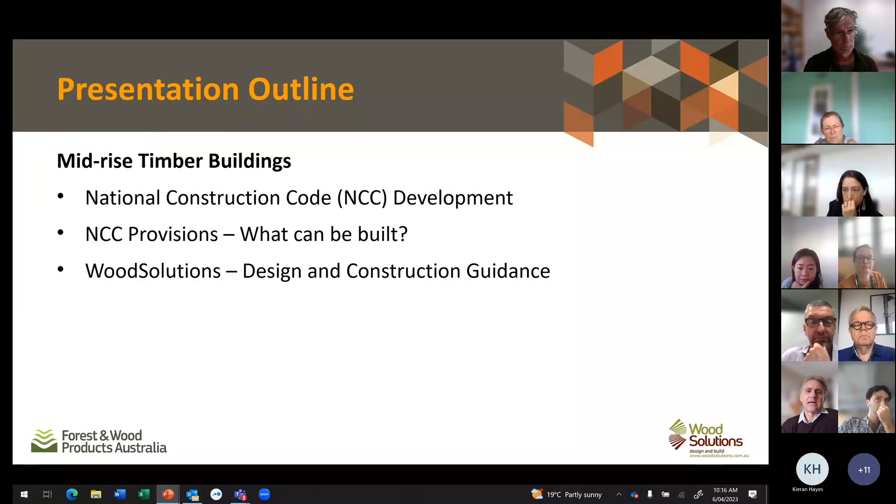Talk about the Wood Solutions program and the design and technical guidance that's provided. That's a program that Eileen Newbury manages. I'll run through just some case studies of some performance solutions that are out there, and talk about the challenges that are faced, particularly when we start to have these larger exposed timber buildings, sort of the issues that come up. I'll just call them challenges because they're not insurmountable, but they're just things that we need to do. And then look at what the next steps are from an industry perspective as to where we'd like to move going forward.

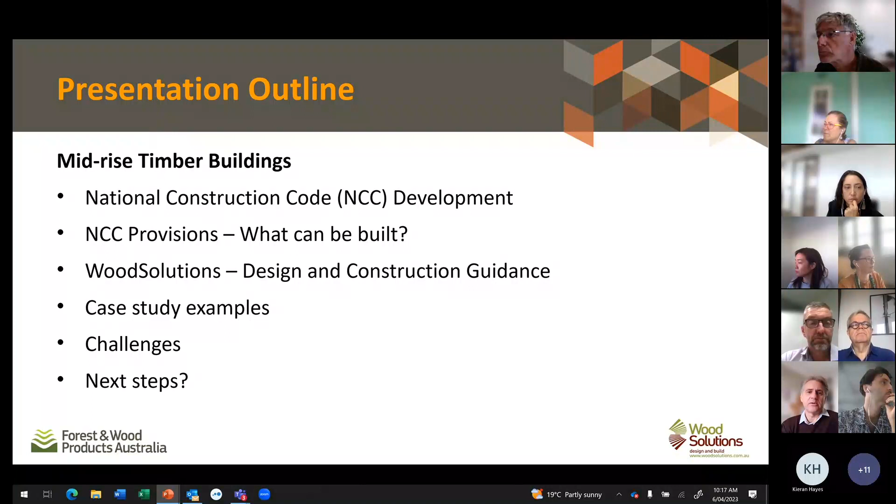So just looking back as to where we've come from. In early 2013, there was a program commenced at Forest and Wood Products Australia, looking at what was the opportunity for us to have mid-rise timber buildings here in Australia. A colleague in that photograph on the right-hand side, that's in Canada. He sent me this photo just as we were starting the program, saying, look what they're building in Canada.

So there's a 6-story apartment block there, and we weren't able to do that under our code. So it was, I suppose, also industry was saying, we need to look at what's happening overseas, and at that time was trying to catch up with what was happening.

So Forest and Wood Products Australia basically engaged with various stakeholders. As part of trying to achieve any national change, we need to engage with key groups such as the national regulators. So we had meetings and discussions with the Australian Building Codes Board as to what we were trying to achieve, and just trying to get some guidance from them as the sorts of things that we need to address, and people we need to have discussions with.

We spoke with every state government building authority around the country, so we had face-to-face meetings. Really, at this point, it was really just understanding what the issues were. What were the technical issues that would stop us from going beyond? At that time, we were able to do 3-story apartment buildings, and what was stopping us from going beyond that, and getting the feedback from the various stakeholders.

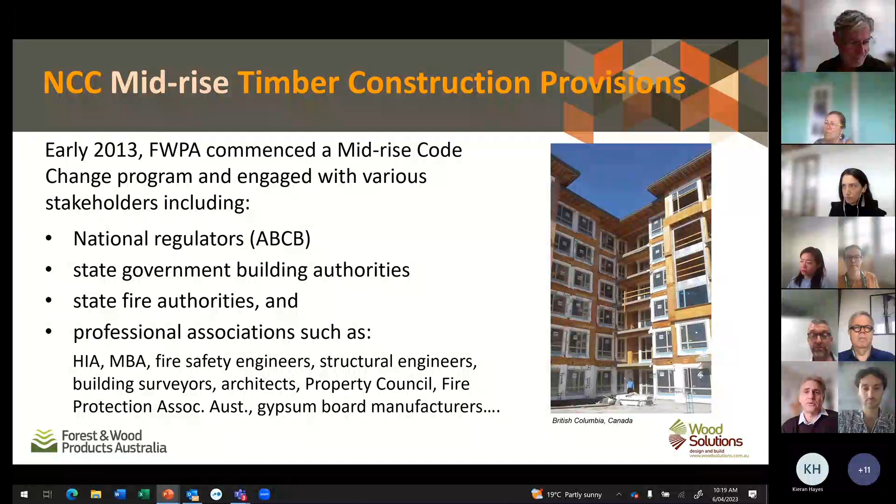So we also met with all the state fire authorities. Again, these were face-to-face discussions, a presentation showing them what we were trying to achieve. But in the first instance, again, just understanding what were the barriers and what were the challenges that we need to address. And again, we then engaged with all the professional associations, from the master builders, a key group in that commercial space, the fire safety engineers, etc. So this first part of it was all about understanding what the issues were from the stakeholders, because you can't achieve a code change without responding to issues and understanding what those issues are.

At the same time, during those discussions, we started the work on what's called a proposal for change to the National Construction Code, or the Building Code of Australia, whichever way you like to refer to it. So we started a proposal for change development.

We're also undertaking some research in that space, drawing on not only what we're doing in Australia, but looking overseas. We're looking at what was permitted, looking at various fire tests that had been undertaken and trying to draw on that information in terms of trying to support the establishment or achieving a code change.

Fire is a key topic for today's discussion. One of the early things raised was fires in timber buildings, so a design guide was developed looking at fire precautions during the construction of large buildings. You'll note there's no mention of timber in that title, because fire is an issue regardless of the material of construction. You can have fires on site, and obviously with timber, when it's an exposed element during a construction phase, before other fire measures or protection systems are in place, it's probably the most critical point. But once all those systems are in place, the buildings are extremely safe. So this guide basically talks about addressing those fire precautions that should be considered during construction.

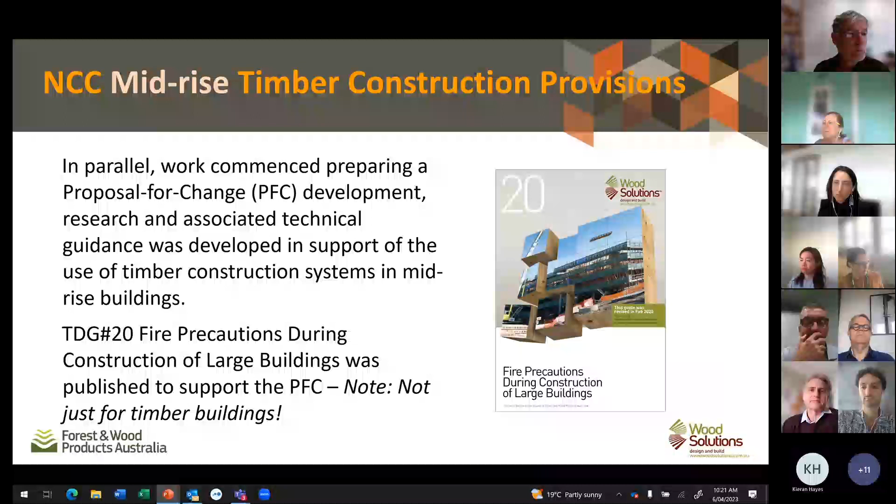Based on the work, and it sounds fairly quick, but it was a lot of very intensive work over a couple of years. A submission was submitted to the Australian Building Codes Board and the Building Codes Committee, the technical committee, for review, and a change was achieved.

So in NCC 2016, we could build class 2, 3, and 5 buildings. Class 2 is basically apartment buildings, class 3 is hotel/motel style developments or buildings, and class 5 are office buildings.

What this change was all about was protecting timber. The term that was introduced was fire protected timber - basically our timber elements are protected by fire grade plasterboard or some sort of fire protective covering. That change enabled us to go up to what's termed under the NCC as a 25-metre effective height, typically in an apartment building that's like an 8-storey apartment building.

At that time, I'll use the word, that was almost like world leading. We'd gone beyond the North Americans. Unfortunately, they've gone beyond us now, which I'll get to towards the end of the presentation.

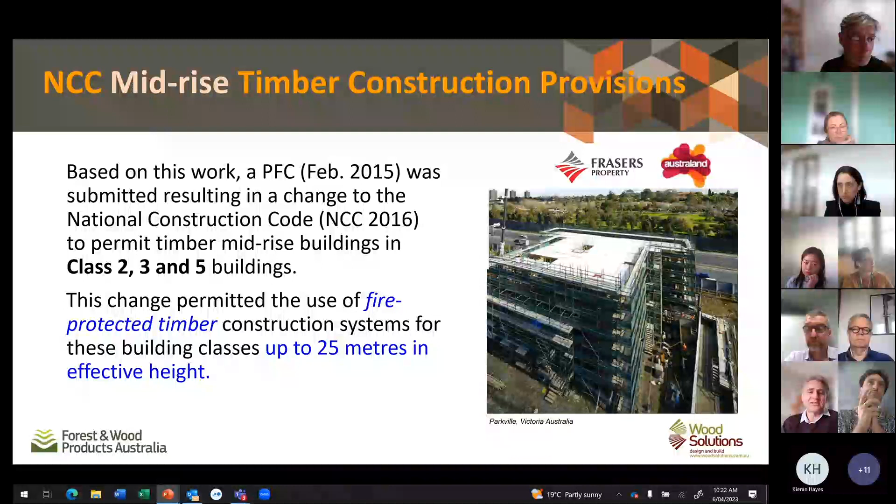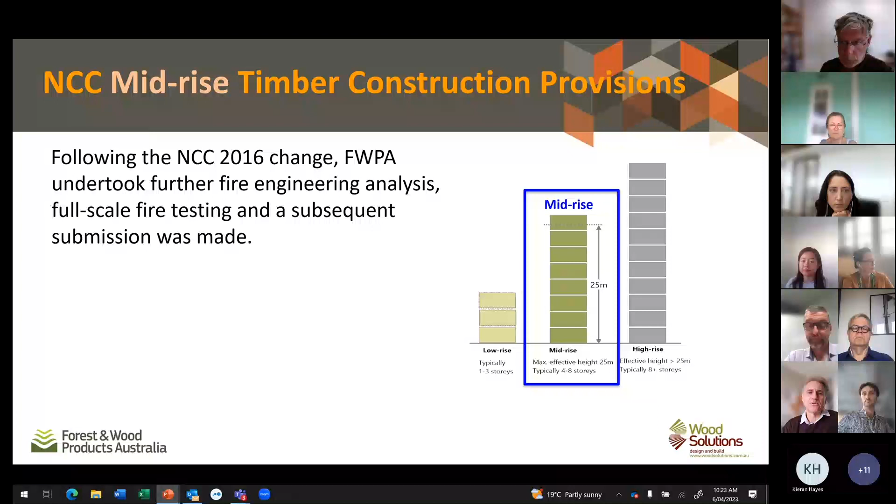Following that change, which was specific to three types of building classes, further work was done - some additional fire engineering analysis, some full-scale fire testing - and a following submission was made. So in NCC 2019, it was amended that we could now build any class of building up to this 25-metre effective height using fire-protected timber construction.

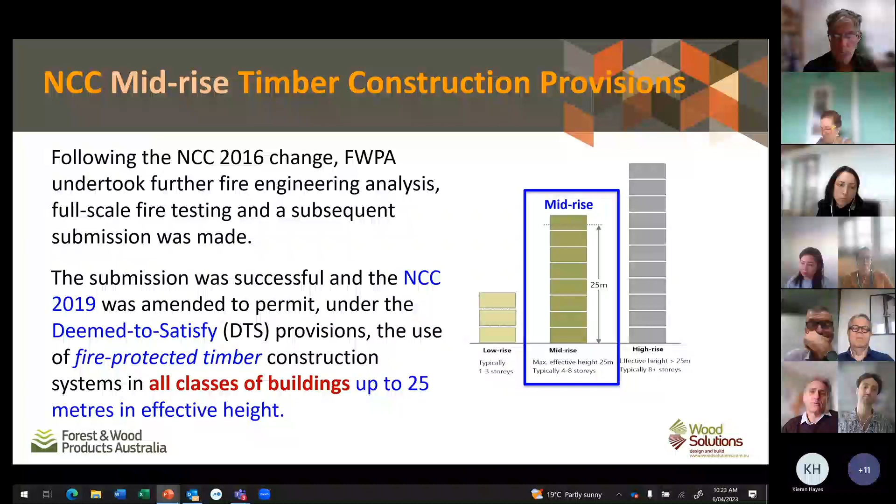One of the little tweak changes made in the NCC 2019 edition - the definition for massive timber originally talked about the use of glues as a requirement, but there are building systems that can be done without glues, such as using screw fixing techniques to laminate your timber elements together to form a mass panel. Or in Europe, they use timber dowels to pull together panels of timber.

So the definition was changed to remove the requirement for adhesive. As long as you meet this minimum thickness of 75 millimetres, you can put together a panel using any type of fixing - be it glues, screws, or dowels - to make up these massive timber elements. And I think the key focus of the discussion today was going to be about mass timber, so that's why I've introduced this as well.

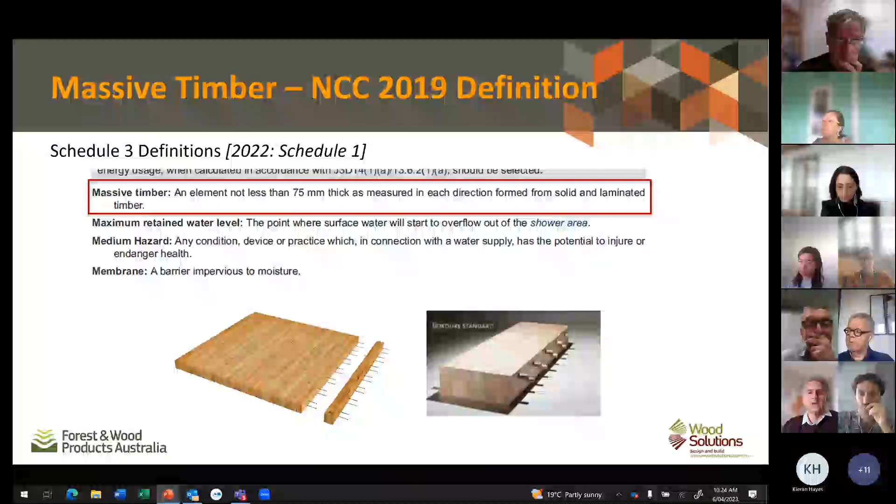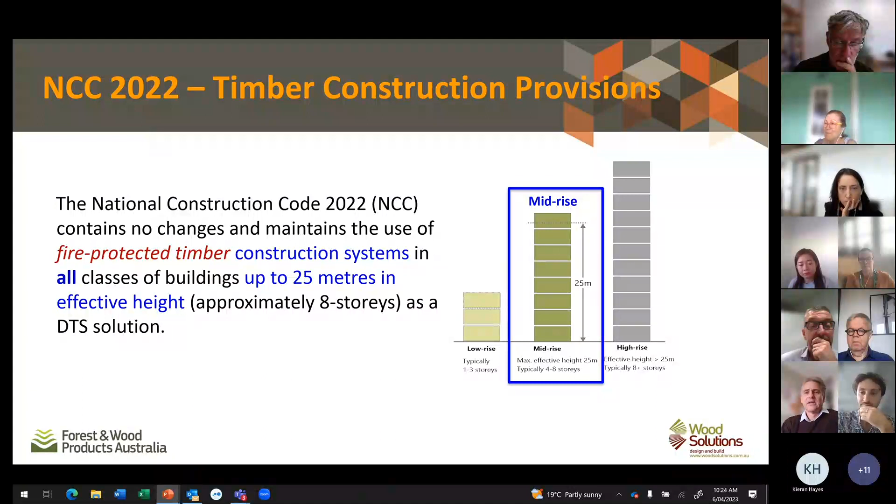There are options under the National Construction Code that can be used. Now we've got NCC 2022 coming in from the 1st of May - there's no further changes to the provisions for fire protected timber, so we can still build up to that 25-metre effective height under the NCC 2022.

One of the things I wanted to talk about, and this is where the discussion tends to happen when we talk about mass construction, is the pathway. Under the NCC there are two typical compliance pathways: a performance solution, where you're not following a recipe, you're doing something a bit different to what the National Construction Code gives you as a recipe of compliance. That's the pathway a lot of these exposed mass timber buildings have gone down - using a performance pathway - and I'll talk more about that later.

The other pathway, what the code change was all about, was coming up with a deemed-to-satisfy solution. As part of that, we also gave a commitment to the Australian Building Codes Board to provide technical guidance to the market as to how these buildings were to be constructed in compliance. So there's a suite of design guides in the market that go through all that detail.

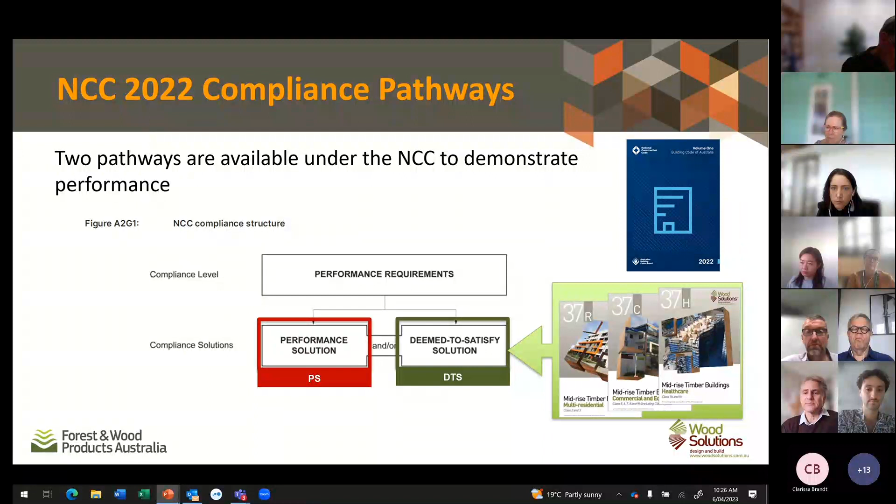So as of 2022, there's really no change. When we talk about classes of buildings, all classes can be built using timber construction. Literally, they're the classes, so you could even build a car park out of fire protected timber if you chose to.

It's interesting, in our code change work we're looking at car parks in Sweden built out of mass timber, fully exposed. There are examples around the world where people have built these sorts of buildings, car parks, using timber as well. But the opportunities are there now, under the deemed to satisfy pathway, to build each of these classes of buildings out of timber.

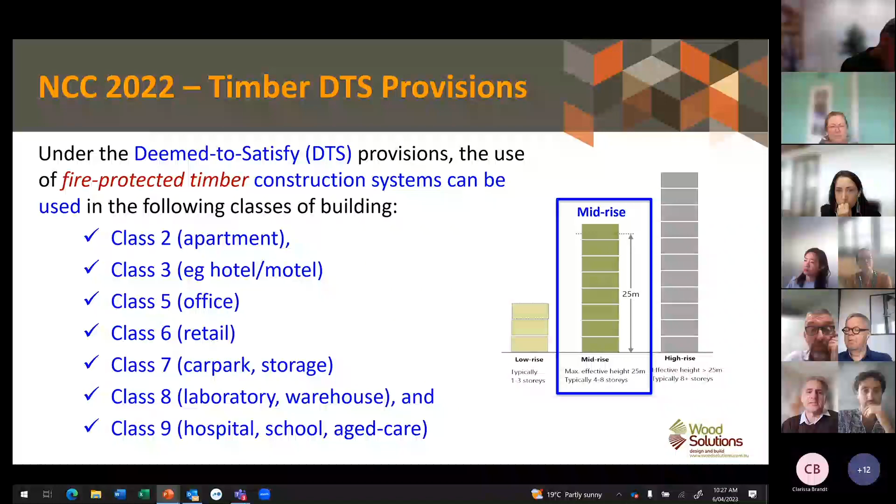Now what's the key provision? Basically you won't see any of the timber under the deemed to satisfy pathway. The term is fire protected timber, and the timber is protected by some sort of fire protective covering. The key to the change is that fire protected timber may be used wherever an element is required to be non-combustible. There are some elements in buildings that the National Construction Code deems must be non-combustible.

In effect, that stopped any timber from being used unless you went down the performance solution pathway. So the way to address that was this fire protected timber solution, which now enables us to use a timber system wherever the building code requires non-combustible construction.

I know there's been talk about timber on external walls on buildings, and discussions around the world about the ability to use timber in that application. Under our National Construction Code, we can. So under the deemed to satisfy pathway, we can put timber construction throughout the entire building, even if an element is required to be non-combustible.

This is based on having the timber protected by fire grade plasterboard, limited to a height of 25 metres, measured to the topmost floor in the building. You've got to have a compliant automatic sprinkler system throughout the building. Any insulation put within the walls needs to be non-combustible. And with our lightweight systems, where you can have cavities between walls - say fire rated walls for one apartment and the adjacent one - to minimise fire going up between cavities, at every top and bottom of that wall we'll have a cavity barrier.

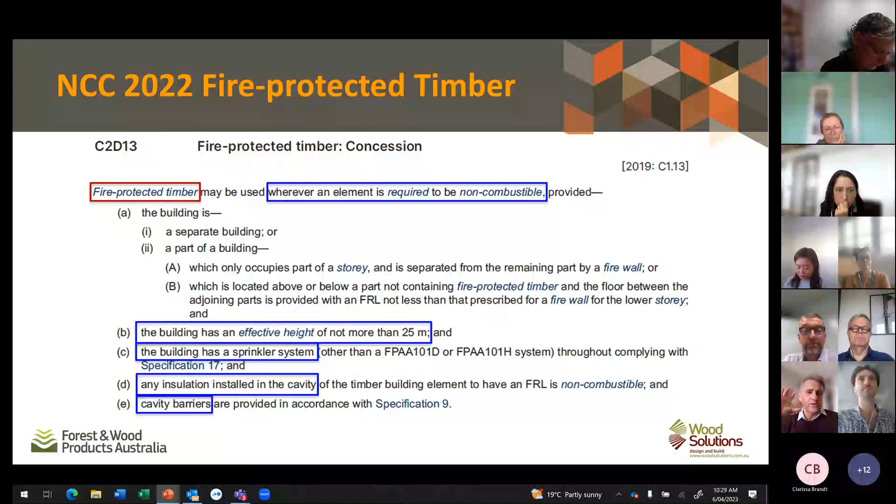Sorry, I've gone into a bit too much detail, but just to say there's logic behind the way things have been done. So basically, under our fire protected timber systems, we have our lightweight option using fire grade plasterboard, or our massive timber systems.

Under the National Construction Code the term is massive timber - we may look to change that, I think the common vernacular these days is mass timber. But at the time we were just trying to use a word that said this isn't just sticks of wood, they're massive bits of wood, so we use the term massive timber. But it's not a big deal, just a point to note. Again, you've got these fire grade linings and the automatic sprinklers as the key features of the construction.

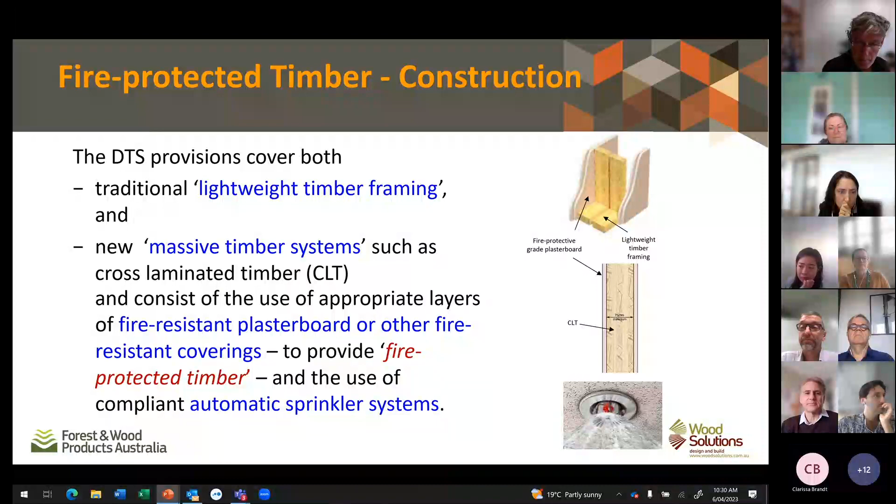Boris, I think we just got a question, if that's all right, Jeremy. Can I ask a question, Boris?

Just to clarify the definition around fire protected timber, in regards to mass timber elements: does fire protected mean that the timber element underneath does not experience any char for that FRL, or can it start to experience degradation of that fire grade plasterboard after say 30 minutes or something like that?

Yeah, thanks Jeremy, good question. I was going to just say, Stephen, I can't see everywhere on the screen when someone speaks - Jeremy's popped into my visual. So if someone puts a hand up, please, happy to take questions during the presentation by all means.

Under these fire protected timber systems, there's a requirement that the plasterboard provides protection to the substrate, to the timber element, for a required period before charring may occur. For lightweight systems that's basically 45 minutes during a fire test. For cross-laminated timber or a mass timber element, that's reduced to 30 minutes. You may experience some charring after that time, and the temperature for a mass timber element during that 30-minute period can't exceed 300 degrees C - that's the point of charring. The reason it was done that way was to give us additional protection, to limit the temperature rise at the interface between the plasterboard and the timber element.

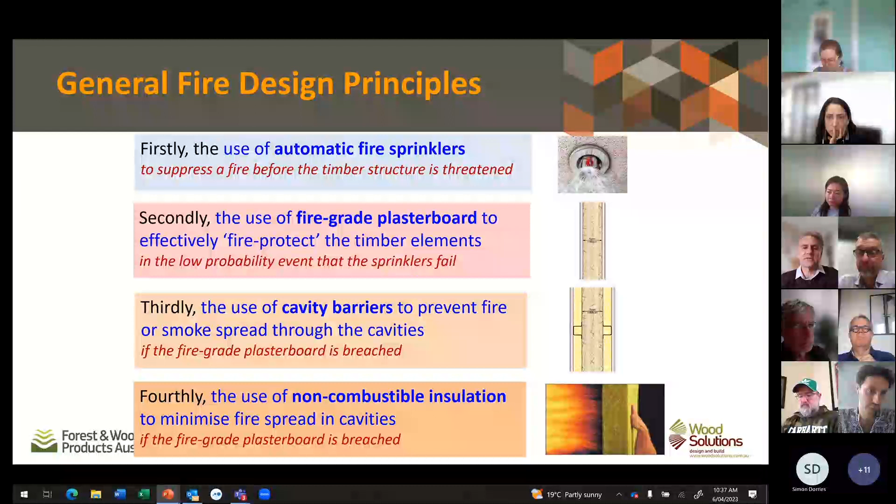So I think, sorry Simon, I don't know if that answered your question. Just trying to think through that, but if not, we can pick up on that later. Simon, you can remind me if I've missed something there.

So these are lightweight systems that are being used. People ask me: are the DTS provisions being used? I had a fellow about 8 months ago from WA call me saying he's designing a 5-story lightweight apartment building and wants to use the deemed-to-satisfy provisions. I got questions about fitting cavity barriers and things like that in response to a certifier. So certifiers are still looking very closely at timber buildings.

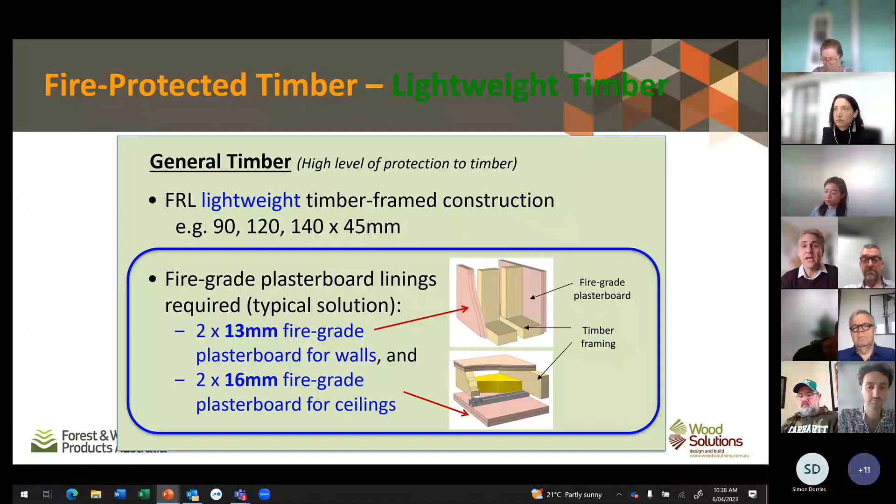So there are examples, but the difficulty I have is I only hear when there's a problem and get involved in that. I don't see the range of buildings being done or completed. Although Wood Solutions has now got a database of timber projects on the Wood Solutions website, so you can start to see the types of buildings being built, which is a great initiative. Now, in terms of the mass timber element, it's a minimum thickness of 75 mil and fire grade plasterboard.

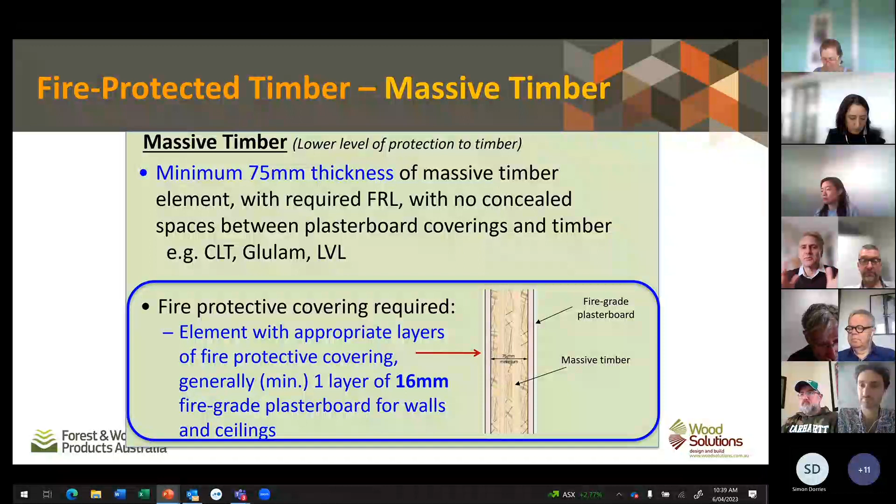We know that if a 90 by 45 fire protected timber system can work as a wall stud or wall system, a large continuous panel of engineered wood product has an even greater ability to resist fire and enhance fire performance. That was basically the logic, and having a minimum thickness was based on structural analyses done to give us minimum performance, both from a fire and a structural perspective.

As I mentioned earlier, we've got a range of design guides that cover all classes of building, and these are basically being utilised by the marketplace - not only as guidance documents, but certifiers will ask for details in accordance with the design guide. The Wood Solutions brand has a very strong status in the market, and these design guides are viewed as the go-to type documents.

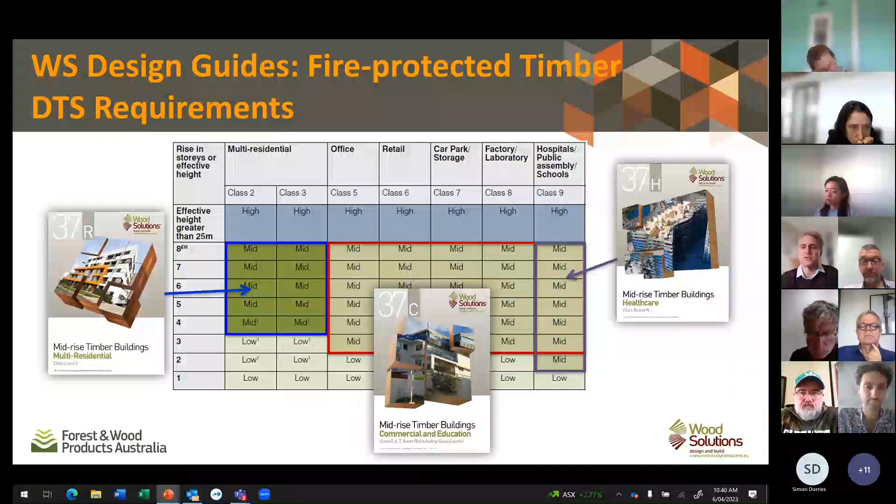So that's looking at protection of our systems. But looking at the NCC - and this is something we're working through at the moment - it is possible to demonstrate compliance with the NCC by using exposed mass timber building elements. There's a presentation on this in itself that a colleague of mine, Andrew Dunn, has pulled together.

Basically you need to identify the type of construction, and under the National Construction Code we've got three types: type A and type B, which are at the higher fire-resisting end, and type C construction, which is typically timber framed construction. Within type A and type B, the taller you go, the more you move into these higher provisions - you need type A construction when you get above a 4-story building.

You also need to look at where the non-combustible provisions kick in. There's a clause - I won't go specifically into it - but there are specific elements required to be non-combustible. Then there are other provisions within the NCC about the transfer of non-combustibility: if you've got a fire-rated element at one floor, that element needs to be supported by an equivalent fire-rated element. This is where all the discussion starts with certifiers, and where the difficulties start to get raised.

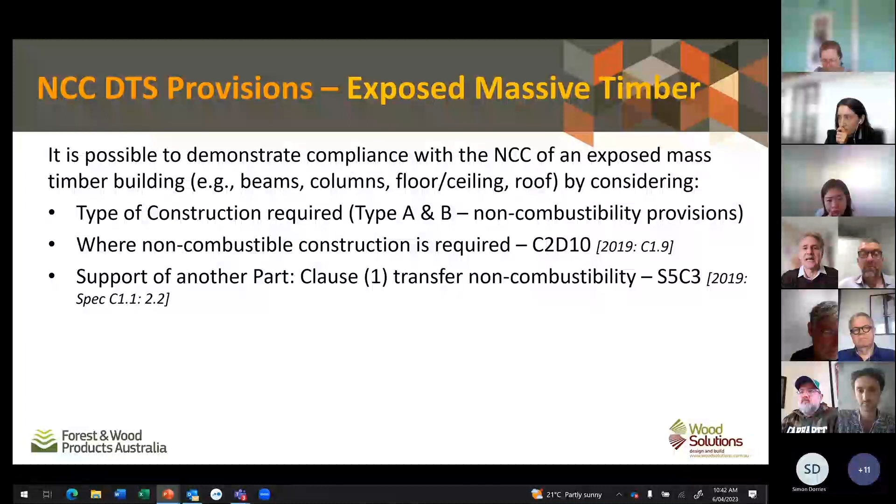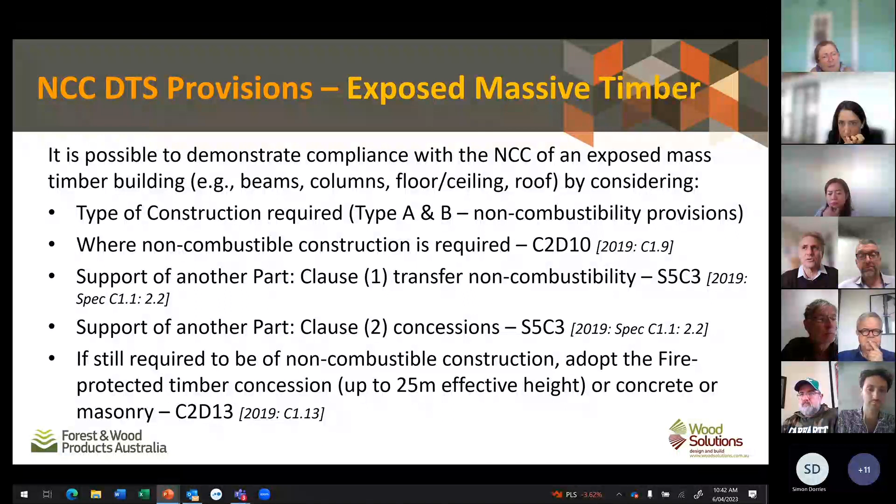There are concessions within the NCC about support of another part that need to be considered. There are some elements where, if you still can't meet compliance via these concessions or other clauses and you're still required to be non-combustible, then you need to look at fire protected timber elements - if up to around 25-metre effective height - or it could just require concrete or masonry construction under the NCC. So this gets complicated, which is what causes a lot of the discussions.

A good summary provided by Andrew basically says that if you're looking at non-combustibility provisions, it's essentially external walls, common walls, non-load bearing shafts and non-load bearing fire-resisting internal walls, but also lift pits with the floor framing and flooring. In this example building, you need a non-combustible facade or non-combustible lift shafts.

There are no non-combustibility requirements on the floors, just a fire resistance level you need to achieve. Columns, beam elements, same thing. There's no fire requirement on external walls since this bracing element isn't contained within the external wall because we've got our facade, so it has no non-combustibility requirements. You can argue through the NCC that you can come up with a solution using exposed timber construction, but you need to get the certifier as part of that discussion. So when we start talking about exposed mass timber buildings, you end up going down this performance pathway because of these difficulties or disagreements in how the NCC is being applied.

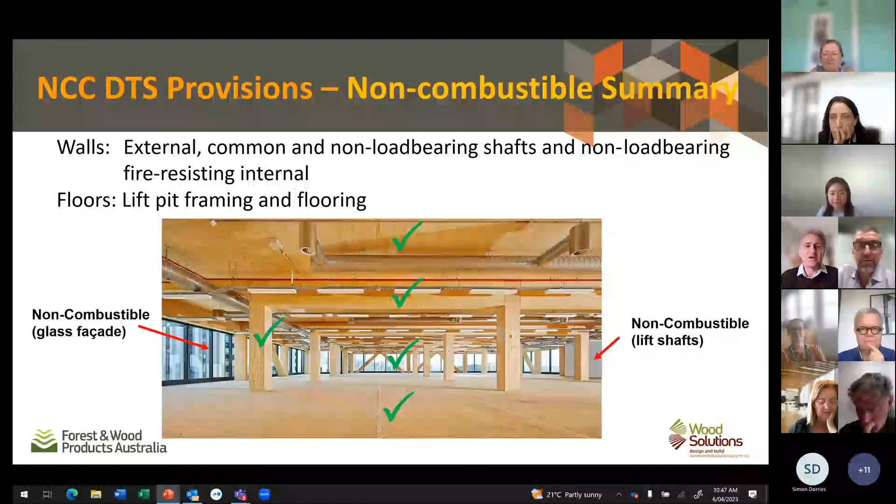I can be cynical, but I'll focus on the timber side. Boris, sorry to interrupt, I just want to be cognizant of time. Not sure how much you've got left in your pack, but maybe 5 minutes, and then we'll do any final questions because there's a few other items to go through. Sorry, I've taken too much time. Sorry about that, Stephen. That's all right, it's all good topic, good stuff.

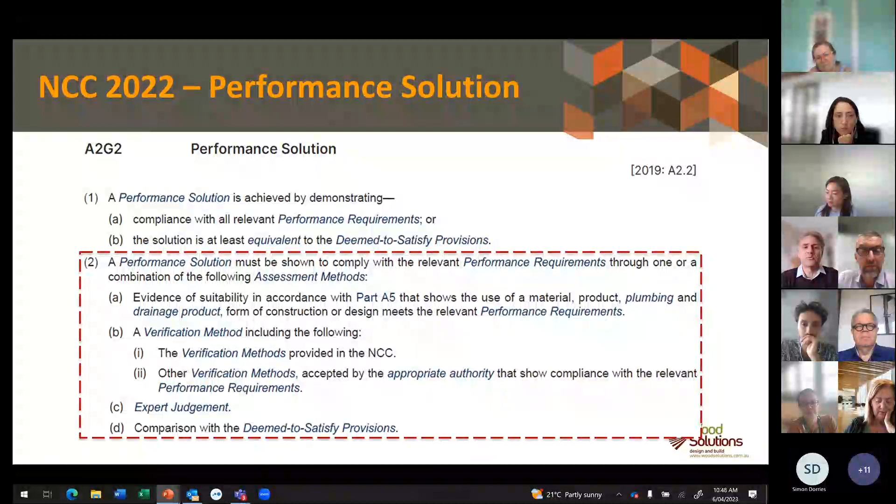I'll go through these slides quickly, just about the performance solution. There are a few steps when you start talking about mass timber buildings - the approach has been the performance solution pathway. There's a range of things that need to be undertaken. Some of the key things: you've got to do a performance-based design brief, work with your stakeholders - get your fire brigades, your engineers, everyone involved, sit around the table and come up with a performance-based design brief, then do your analysis. There's a lot of steps, which I think is one of the things that puts people off going down a performance solution pathway, even though the building regulators want people to go down this pathway.

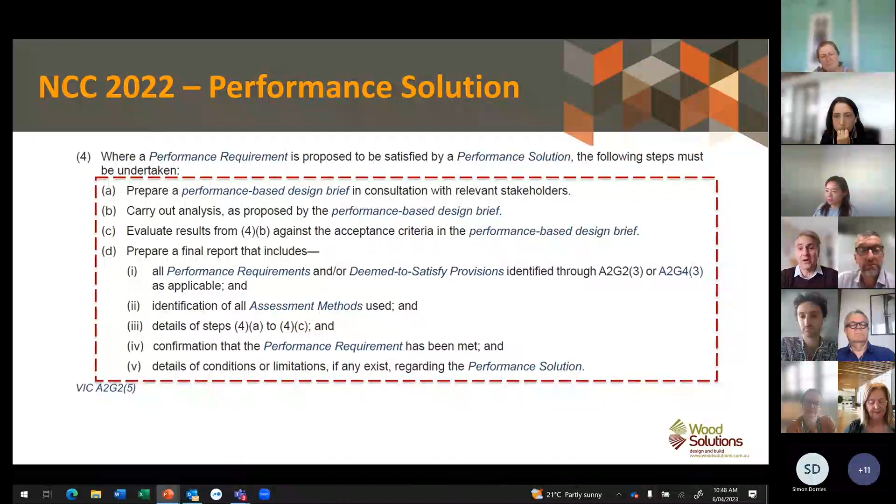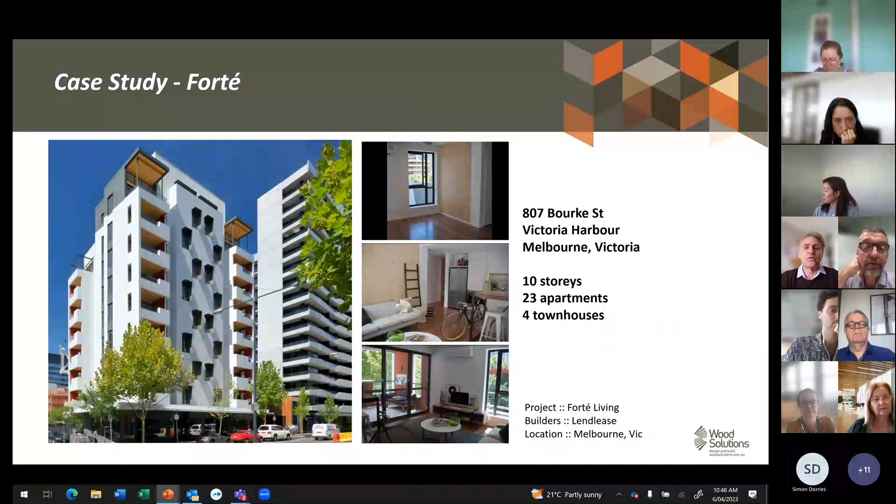So just a few examples of performance solutions that have been done. I suppose Lendlease was one of the first here in Australia, with the top right hand image showing exposed timber element within the room, but there's a lot of protection otherwise, plasterboard protection provided in that building.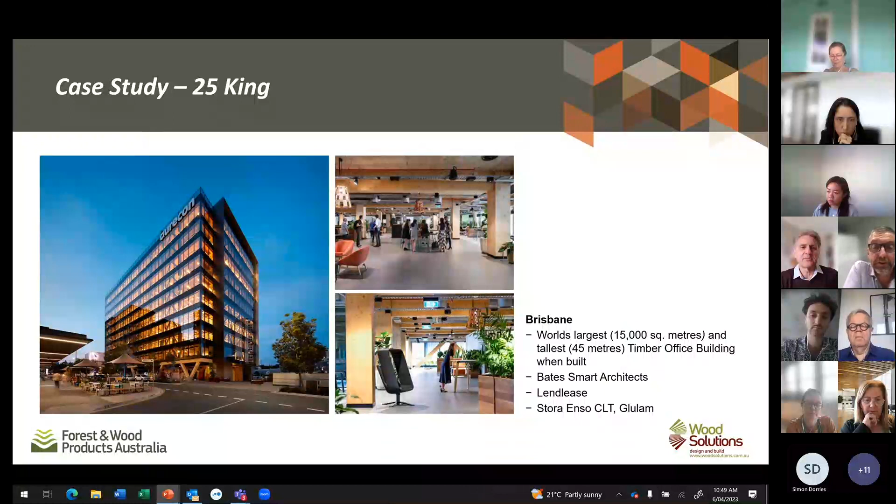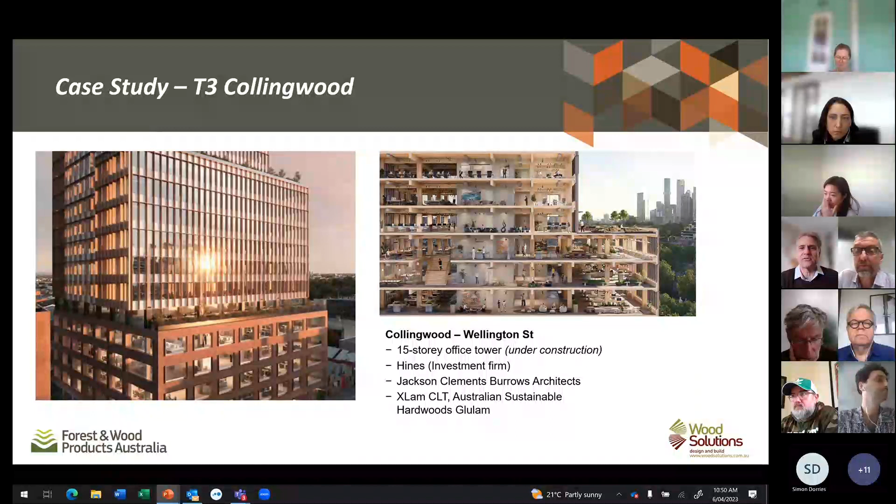And then the Atlassian building, they're talking about a 40-story tower being done in Sydney. So there are people really pushing the bounds and really keen, and this is all being driven by sustainability. People want to build in timber for those benefits.

One of the comments I wanted to make was with the Olympic Games in France, where basically half of their public buildings need to be built out of timber. So there are people wanting to build using timber construction for environmental reasons.

So what are some of the fire challenges? I talked about performance solutions and having to engage with people. That's one of the things that's still a challenge with mass timber, just increasing the understanding of building professionals. So design guides, seminars, webinars are all there to try and engage.

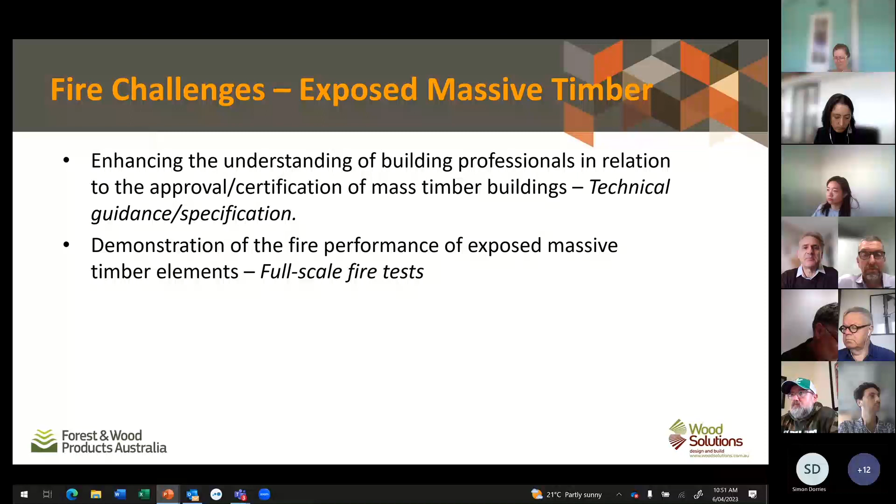Demonstrating the fire performance of exposed mass timber elements. A lot of work's been done in that space, with fire test reports now being available through major manufacturers of timber elements. The adhesives issue has been raised time and time again, and there's full-scale fire tests that have shown the performance of these new adhesives that can be used.

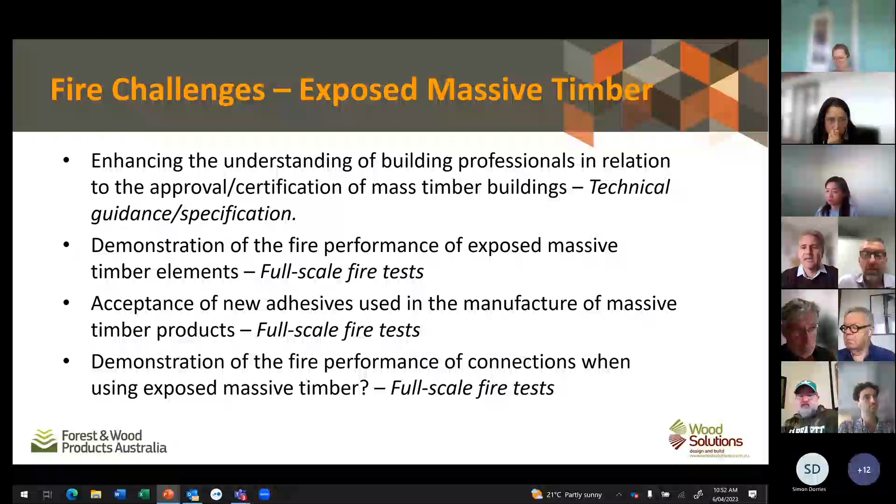Connections are the other issue. So you've got exposed elements, a column and a beam - how do you detail that junction? There's been full-scale test work looking at a range of different types of connectors and ways to protect those connectors. So it's not the timber that's the issue, it's the metal in that connection that becomes the issue.

So what are the next steps? This is what the North Americans can do. Through the International Building Code, they've got 2012 and 2021 versions - that's when it first started with the introduction of different types of timber systems. So fully encapsulated systems can go up to 18 stories.

They've got exposed building elements with some or limited exposure that can get up to 12 stories. Fully exposed timber buildings can go up to 9 stories. And they've always had this heavy timber construction, like the old 200 by 200 columns, which can go up to about 6 stories.

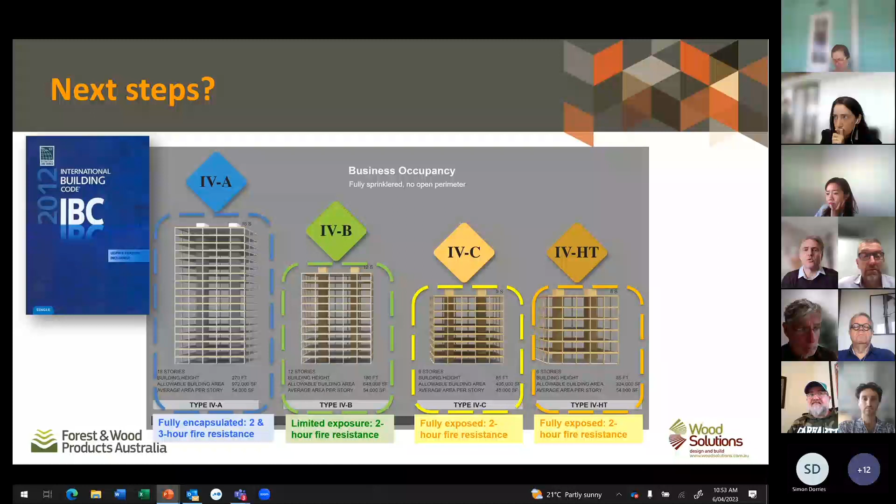So from an Australian perspective, we're looking at what's happening overseas and saying, it'd be great to do some of that type of building here in Australia. And that's what we're working towards, to try and open up the opportunities for a bit more exposure in mass timber construction.

So from a timber perspective, what's old is new again. You've got Perry House in Brisbane, built in 1913, post and beam construction, now converted to apartments. And we're doing post and beam construction in 2018 with the 25 King. So we've done full circle.